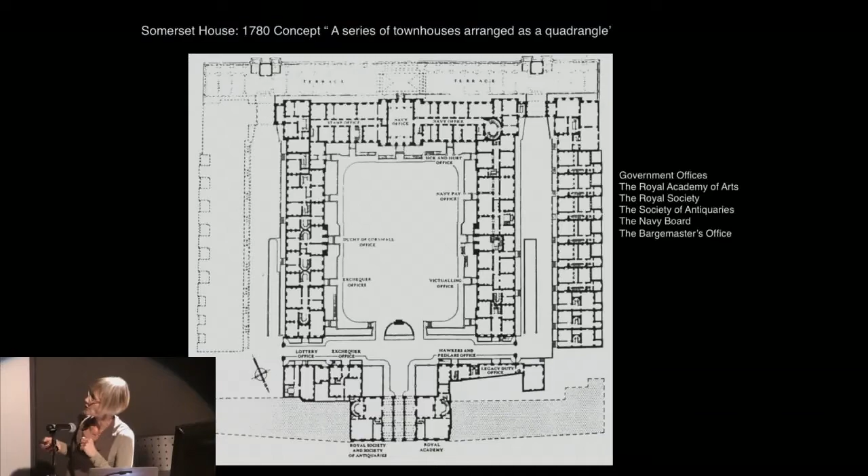And what's kind of amazing about this building is that the concept here, William Chambers' concept, was that it should be a series of townhouses arranged as a quadrangle. So the idea that each department and the various people who lived and worked in this complex was conceived as a kind of collection of houses, of townhouses.

So this kind of confluence of civic building, urban form, and the idea of a house is fascinating as a kind of model of a mixed-use urban building from 1780 that today finds life, contributes to the cultural life of London in such a proactive way. This transformation, this adaptability of the type of this heritage building contributes to the social culture of London as much as the architectural culture, and is a wonderful example, I think, of heritage that becomes part of a future urban life.

Now I'm going to talk a little bit about my origins. I often get asked at the end of lectures where I came from and how did I get where I am, so I thought I would get it over with at the beginning. Maybe it would give some insight into my approach to city building and ideas of identity, urban identity, architectural identity.

One of the reasons I was brave enough to put this on the screen is that I read Louis Sullivan's book, The Autobiography of an Idea, a couple of years ago, and it amazed me, the honesty and the mystical quality of Sullivan's approach to nature and the conjunction of major infrastructure projects with the American landscape in the mid-19th century.

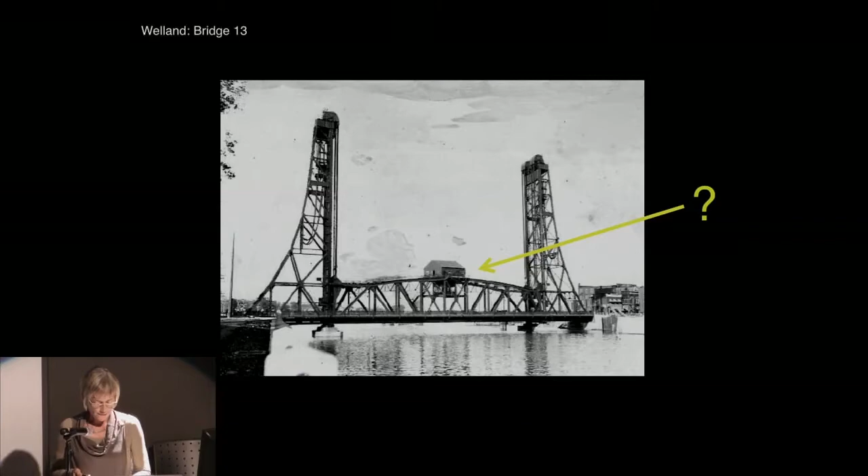But then, of course, this was my nightmare - that I would be stuck up at the top of the bridge with the bridge master, and then one of the cables would snap on the big concrete counterweights and we'd come crashing down. So you could say I was traumatized and fascinated at the same time by this piece of infrastructure.

This slide is interesting because I always felt Welland was a sort of lost place, that it had this ambition - this amazing main street image, a kind of mini Eiffel Tower at the end of your main street was a fantastic thing.

The courthouse, which is still there, and the clubhouse, which has since been torn down, were among the few buildings of architectural significance on the banks of the canal. They demonstrate a kind of civic aspiration at the founding of this city, and the hope that Welland might someday be another Manchester, who knows.

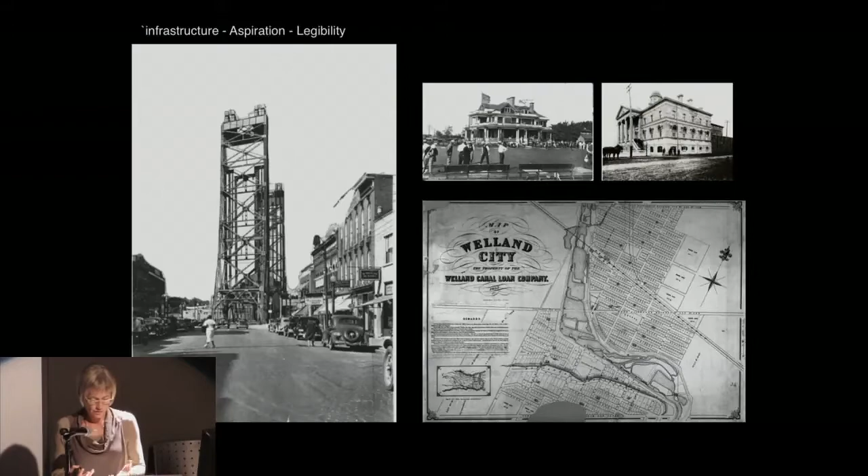But one of the problems of Welland was that it never really had a good urban plan. It was a very confusing place to live. The Welland River crossed the canal, and there were also train lines, everything just converging in a disconcerting way. So the legibility and quality of the city as a series of civic spaces was non-existent - this was about as close as you'd get to a civic space.

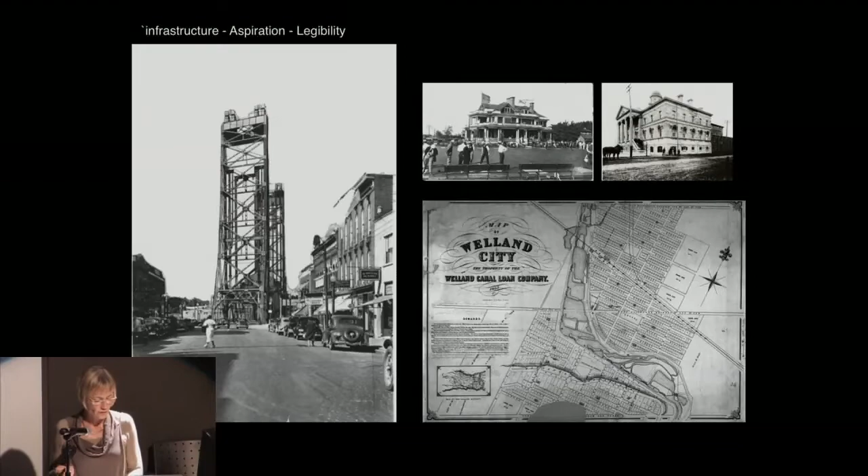Welland kind of died when the industry shut down - Atlas Steel, Union Carbide - and then it really kicked the bucket when the Seaway Mall was built. The downtown core died overnight when this was built, I think in 1974.

To me, the words of Gertrude Stein kind of epitomize all of these places that are faceless, identityless and ubiquitous in the North American landscape - the mall, the box building with its parking lots.

But not everything was bad in the Niagara Peninsula.

I sort of grew up with these books around the house. My mother actually took a very serious amateur interest in the early architecture of the Niagara region. This book, which I have a copy of, number 495 out of 500, is by Peter Stokes, who taught at the school. I actually took his measured drawing course, and I think I got a C, which I was really disappointed with.

I just want to show how this kind of tradition, the art of measured drawings, and really understanding how something like a door comes together out of the various pieces of wood and the joints, and just the joy of drawing and of really understanding how things are made traditionally in architecture by craftsmen, was quite an influence on me. This is a reissuing of the book, which I understand happened a couple of years ago.

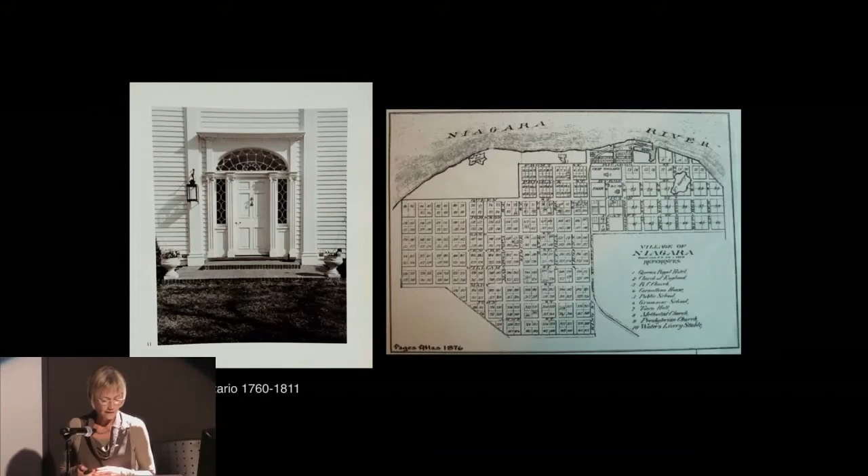Apparently nowhere else in the world of neoclassical or even Adam architecture are elliptical fanlights found. It's only in Ontario. And obviously the very legible, rationalist urban planning, which meets the river in a very direct way, is basically a format for a sort of urban infrastructure that has endured and has become a kind of showcase of the Niagara region's vernacular.

Some would say it's overly touristic now. I haven't been there in probably 30 years, but I still think that there's an understanding there that the quality of architecture and the way it operates in its urban landscape is something that's generated huge social, economic and cultural value, not just for Niagara-on-the-Lake, but for the region.

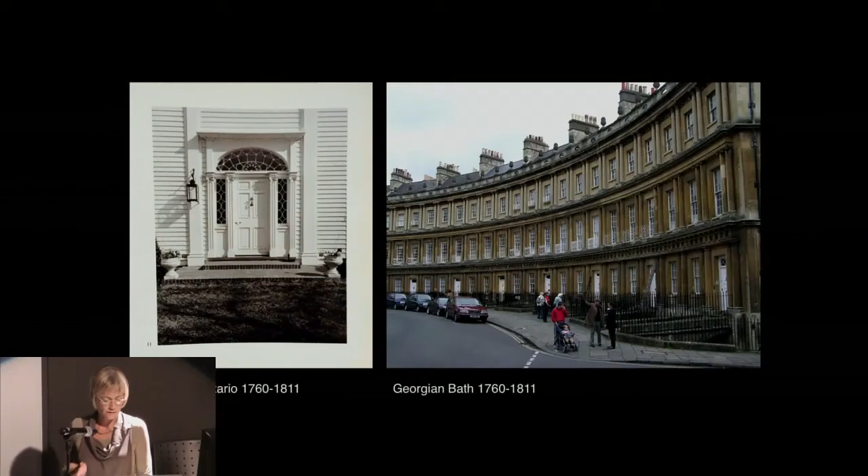What's interesting for me now in retrospect is to compare the Georgian architecture of early Ontario house building with what was happening in Britain at the same time. So Bath and its crescents was a simultaneous urban and domestic architecture, a development model at the same time that early Ontario towns were emerging.

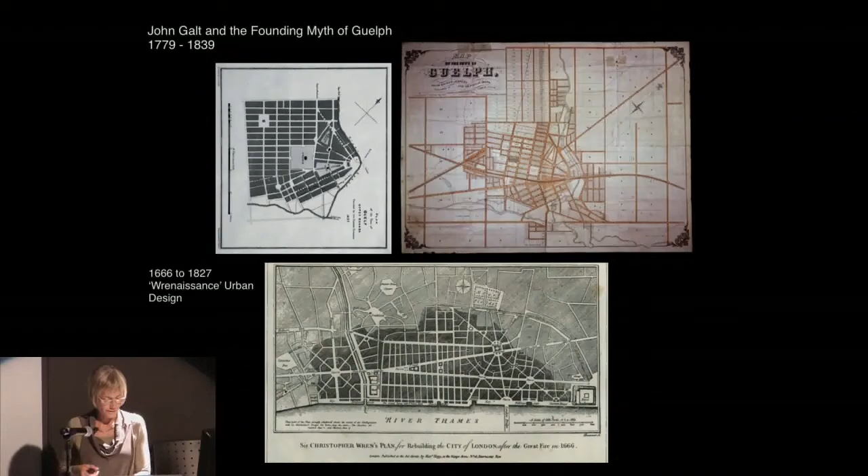The move to Guelph was part of a shift from an industrial town to a university town that did have an urban design. Here are plans of John Galt's original concept for the town, based on its radial configuration and access to the cathedral, and how it evolved into a bigger scheme, drawing on the tradition of Wren's reconstruction of London and what's called Wrenaissance urban design, since Wren was building on the Renaissance tradition. That's a typical use of the word in Britain.

What's significant for me, and relates to what's happening in Waterloo and other small cities that are the subject of this exhibition and festival, is that the civic quality and clarity of Guelph's urban plan, supported by coherent Georgian architecture made primarily of stone, this consistency of material form and urban design is a great heritage quality of Guelph.

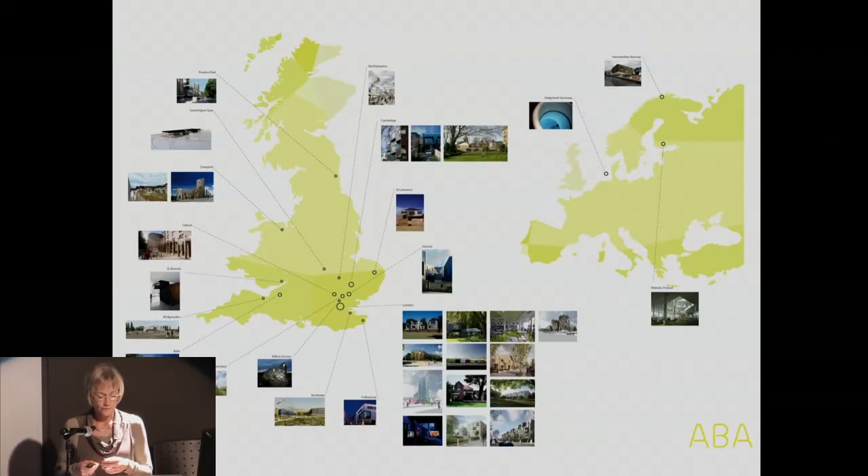In a way, I now see this thesis project as the project of my practice — this project of city building. Although that wasn't intentional or overt when I started my practice, it's funny how these things emerge from your experience and become a project.

This slide is a synopsis of the projects ABA has either built or is delivering across the UK. You can see mostly projects in London and the southeast, some in northern cities. This demonstrates the economy of Britain as well — all of the economic activity is around London, and the north is still suffering. We've also done competitions and various projects around Europe.

This is another image of the projects — all of these are what we have either on site or in the office in planning stages at the moment. This is Accordia in Cambridge, which is built, the South Acton estate regeneration, Tribeca in Liverpool, another estate regeneration scheme, the South Kilburn estate regeneration, Dollis Valley estate regeneration — a master plan for 620 dwellings and a community centre based around three squares.

A scheme in the Olympic Park, another scheme in Ealing in London. This is Bath, and this is Cambridge.

The reason I put these all together is to test for myself the notion that maybe these buildings don't have to be housing, that they can be urban buildings, and it doesn't really matter what the use is — they can become office buildings, hotels, workplaces, studios. Housing is actually the stuff of cities, and if it's robust, adaptable, and generous in its spatial and material characteristics, it can become a kind of adaptable future heritage.

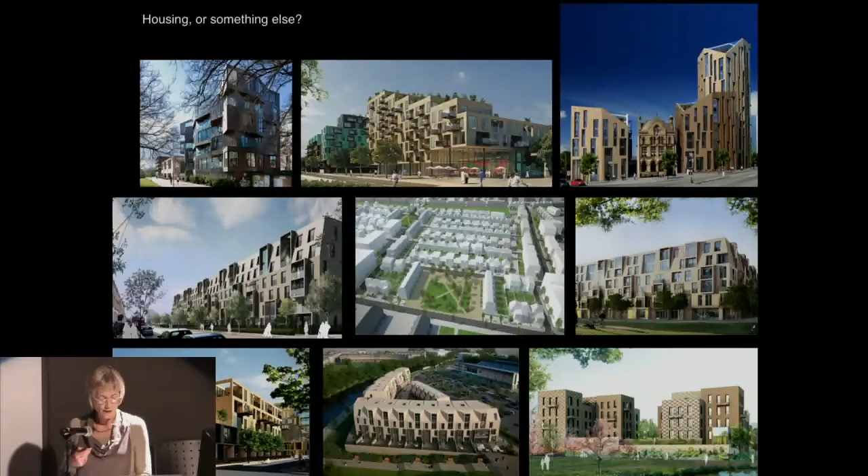This is my little reference to Darwin and his theory of evolution — that the fittest survive through adaptability — and I've added the term generosity, because I think that's one of the huge problems in the collective consciousness of people who commission buildings: a lack of generosity, in spatial and material terms, which contributes to the decline and unsustainability of buildings.

This is a little project we did, a competition called Adaptable Futures, where our proposition was to modify the warehouse typology, both in terms of spatial layout.

It's a kind of hybrid of office building and warehouse, with floors at different heights, so you actually would rent volume instead of area. That's not only the rigor and economy of construction part of its adaptability, but also the iconography. The idea was that the crest of Oxford Brookes University, a potential client for this building, was abstracted and enlarged to become a pattern within the glazed brick of the building.

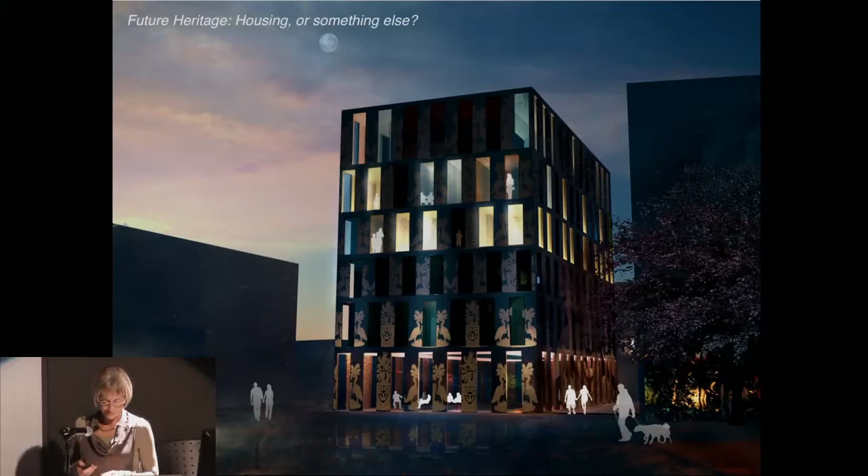So this combination of robustness, adaptability, and iconography means the building has more chances of survival in this climate, as part of an investment in the future.

Here's another concept that drives our work: this notion of hybrids, that hybrid structures are also more adaptable. Some of the projects we're doing now look at how to combine the principles of a mansion block with a warehouse, with explorations in geometry, crystalline or trapezoidal geometries, as part of translating these historical typologies into ones about our present condition.

This is another reference. This was our concept for our Newhall Be housing, that a suburban development can be a kind of hybrid between a traditional English shopfront you'd find on a normal street, a barn—this is a very famous barn in Essex—a Miesian patio house, and Brancusi's totems.

This was our aspiration, that the development would have both a sculptural quality, a reference to the local vernacular of barn buildings, and also that the suburban house would be transformed by having workspaces within the houses themselves, so that the suburb becomes a place of work.

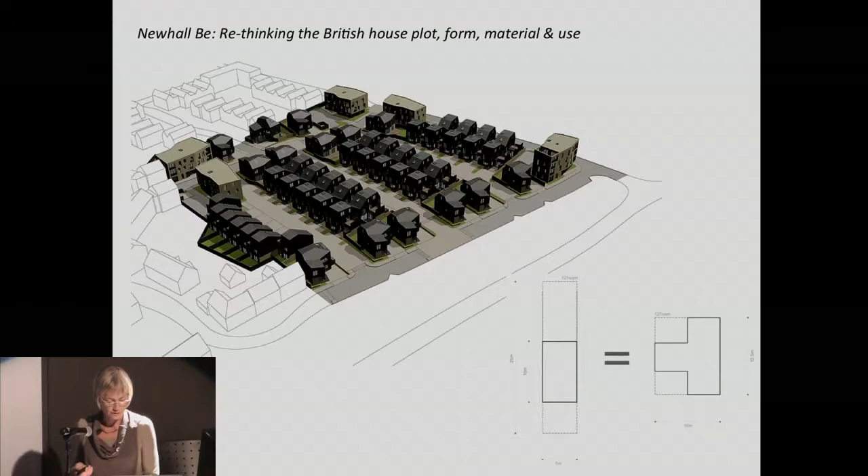There are no gardens because the houses are packed back to back, but the spatial offer in these houses is about 25% bigger than what you'd get in a standard British developer house. This is just one example—you can see lots of images of it on our website.

But it's just to make the point about the idea of the hybrid: each one of these front rooms in each house is an office, a home office. Some people even have signs up of what they're doing, like wedding photographers or web designers.

And the adaptable roof houses were sold with the top floor unconverted. For £8,000, you could put in a stair, line the loft, and get another room in the roof.

So this kind of mixing of references and building in adaptability and spatial generosity is, I think, one of the key reasons why this project has achieved such recognition in terms of British house building.

Now I'll go back to London, and I'd like to refer to this evolution of London, because it starts as a Roman settlement a couple of thousand years ago, and it incrementally grows. It's a sort of radial growth, and it evolves into a very dense network that continues to be radial and is interspersed by garden squares and parks.

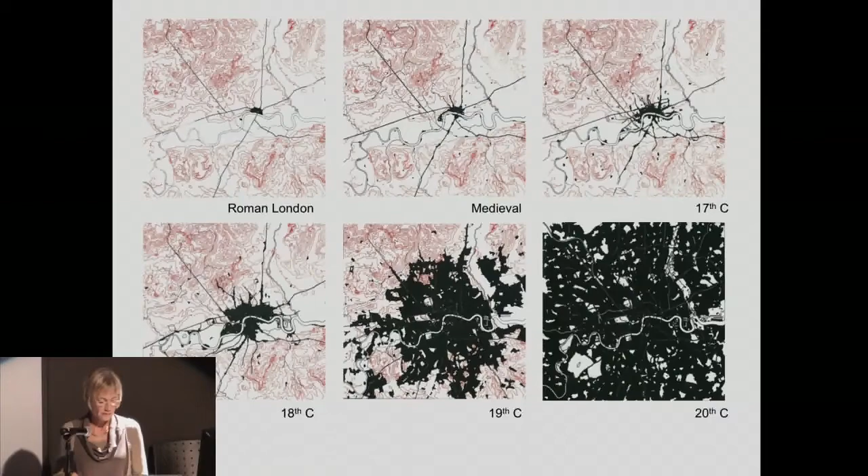So now London is one of the greenest cities in the world. It has one of the highest ratios of open green space per citizen compared to any other world city, but at the same time is very dense, networked through rail, transport, and underground systems that make living in London actually quite sustainable.

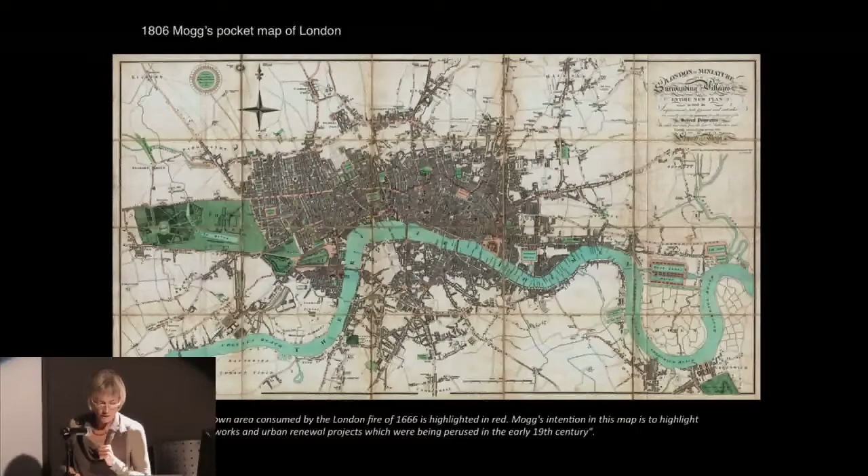Nobody really owns a car in London anymore, unless you live on the edge and have somewhere to go at the weekend, which I don't, because I'm Canadian. I don't know anybody who lives outside of London. So it works for me, although I do have a car, I have to admit.

And then this map I find really fascinating because it starts to reveal the kind of urban character of London as it grows with the advent of, or the institution of, the royal parks, and then you can see the squares, garden squares in the center, and the outline—this red outline—of where the Fire of London occurred.

And the reconstruction. What I find really interesting in this quote is that Mogg's intention was to highlight the various city works and urban renewal projects which were being pursued in the early 19th century.

And it's kind of amazing to think that they were thinking about urban renewal in the early 19th century, even though the city was still growing, it was still in its infancy.

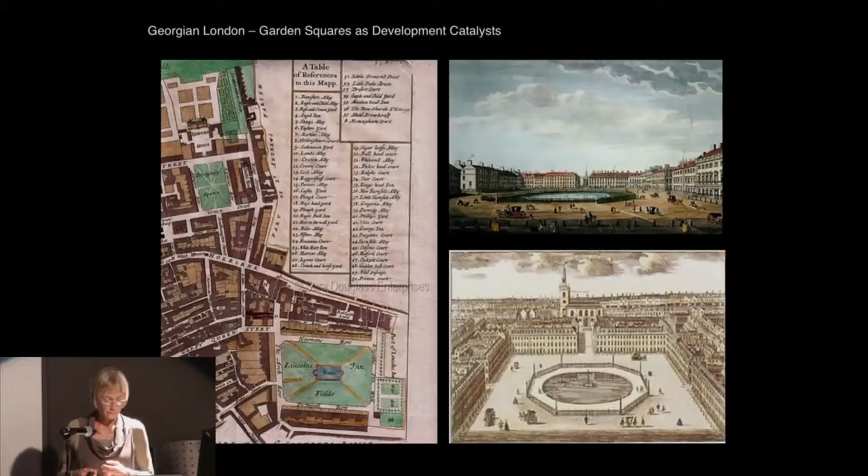One of the other main types of urban development model to which many people in London are now building on, like developers and regeneration projects, are all building on the tradition of the London Garden Square, which in very simple terms was initially a developer offer to attract people to buy houses with access via keys to the Garden Square. So the idea of London's Garden Square actually came from a commercial development impetus, and now is one of the great assets of living in London.

This shows the distance between squares, which is not that much, and how the grain and character of the city is hugely enriched by these captured pieces of landscape. And of course there's Regent's Park and Hyde Park and St. James's Park and all of the other great park traditions.

So in a way, all of these are part of a principle that I adhere to and try to promote in my work, which is that housing is urban design. You can't divorce urban design or urbanism from an act of building, because you always impact the city or place in which you build, and housing should act as a cultural artifact, a meaningful and enriching cultural artifact in terms of people's quality of life and the character and quality it offers to the city as a kind of public act.

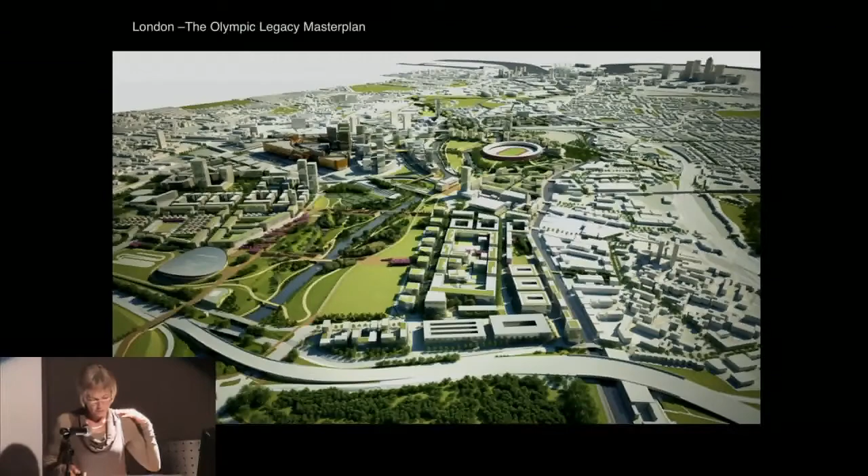This is zooming into the various places in London where we're doing regeneration schemes at the moment. One of them is in the Olympic Legacy Master Plan. We're doing a competition at the moment on a team with, I think, five other architects altogether to implement this whole side of the Olympic Park.

This is going to provide 1,500 new homes and a cultural center, school, all sorts of other uses within a maximum build envelope of 6 stories. And actually the master plan is evolving so that it's only townhouses overlooking the park.

This is the kind of city building initiative that's going on in London. This is on site right now, Chobham Manor, in between the Velodrome and Stratford, which has been completely rebuilt, Stratford City Centre.

This is another master plan where one of our projects, we collaborated on this master plan for the South Acton Estate Regeneration with another practice, and that was phase 1, this is phase 2, and our building is on site at the moment. It's very much about reconnecting the estate with a new series of streets and public squares and gardens, and then there are private garden courtyards in the center of each block. And there are also houses.

So the principle is for every development that it provides mixed use tenure. Every development is 50% affordable, 50% private, maximum 6 to 9 stories high, and a mix of townhouses, terraced houses, courtyard houses, and urban blocks.

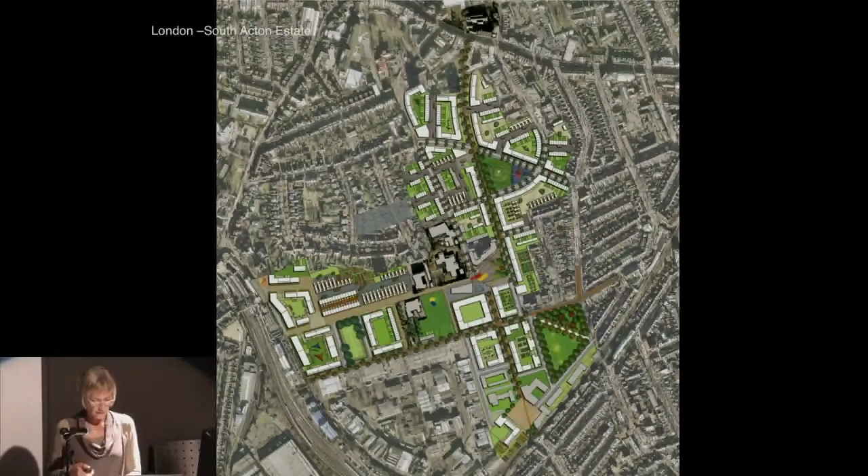So this is another estate where we have a project underway at the moment. It's in South Kilburn, an estate built in the 1960s, and this is the second project we've worked on with the client being the London Borough of Brent.

This is an interesting contrast to our other projects where we're working for the developer at planning stage. Here we're working for a local authority who delivers schemes up to planning. Local authorities own tons of land in London, so they can secure parcels of land, sponsor a project up to planning, and then tender it to the market after consent is granted. This removes risk from the developer in designing something that might not get planning, speeds up development, and ensures each local authority rebuilds its estates according to a long-term vision of the urban character and grain of that neighborhood.

So when we were bidding, this was also a competition. We bid on a team for this with another architect to do this site.

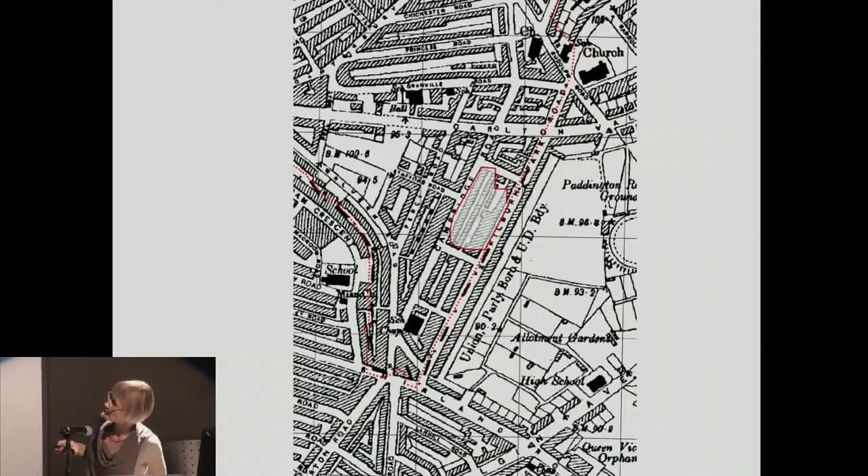I always refer back to the 1880 or 1890 Victorian plan of London, which was, in a way, a sort of perfect urban design. Very legible major streets, boulevards with larger buildings lining them, then smaller blocks as you move into the neighborhood away from the major streets. These were generally terraced houses or mansion blocks, with a park at the center of the site. There's a consistency and clarity to Victorian urban planning that doesn't really get talked about much. I think it's a good subject for somebody still at school to pursue.

So this is the overview of the site. It's called Bronte and Fielding House, which is kind of poignant, after Emily Bronte and Henry Fielding. And this is actually Bronte House.

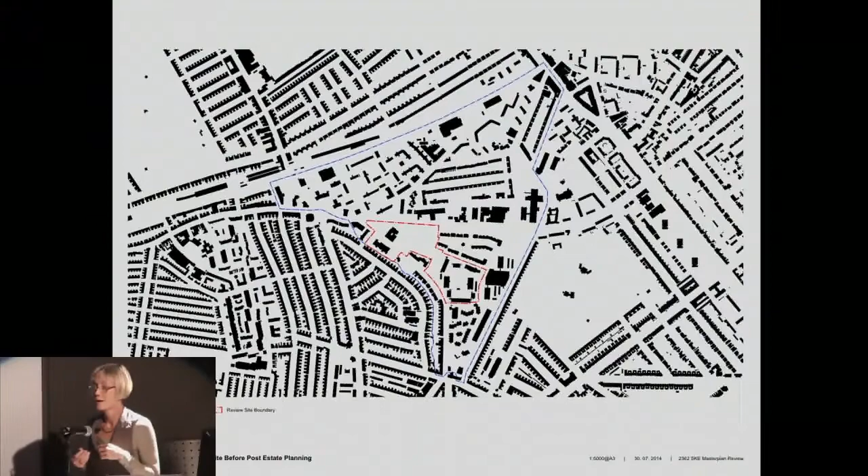This was in 1989, so it's only being redeveloped now, which shows you how long urban master plans take to enact. This figure ground plan shows the atomization of buildings in the context of very coherent and consistent Victorian urban terraces.

And this is the master plan as it stands now. ABA has reworked the whole master plan on behalf of Brent Council to update it and include the new developments that have happened in the last 5 years along here. We were then asked to come up with a completely new master plan for the centre of the scheme, and our revised master plan for this area is now becoming part of the statutory planning guidance for Brent, for the South Kilburn estate.

Sorry, this is out of order - that was the master plan 5 years ago, and this is the current master plan.

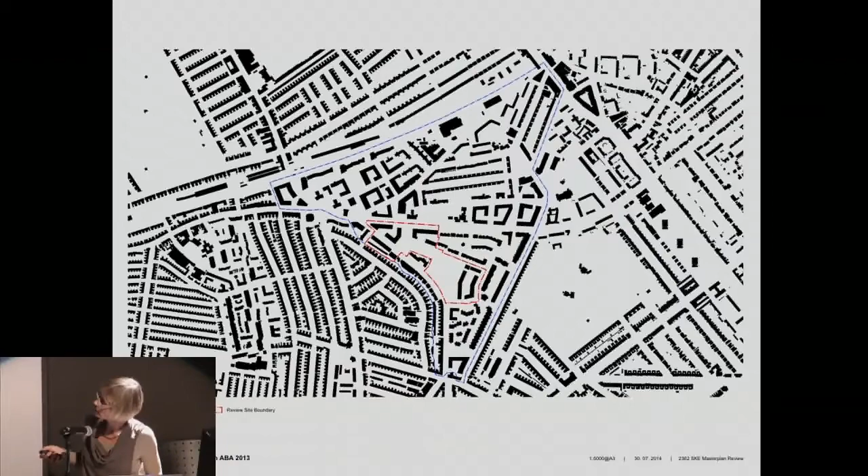So the first piece of work we did for Brent was a site at the top of the plan, where we basically infilled what was an empty part of the site. I think my slide actually flipped around. So here you can see the buildings we've inserted create a new urban block and a mews, which is part of repairing and restoring clarity to the street and built frontages, with front doors opening onto the street as opposed to the slab block in space.

These are actually 2-story maisonettes with 2 stories of flats above. There's little mews houses, then a little apartment building, and a kind of completion of a flat iron block. So we've created a kind of modified garden square.

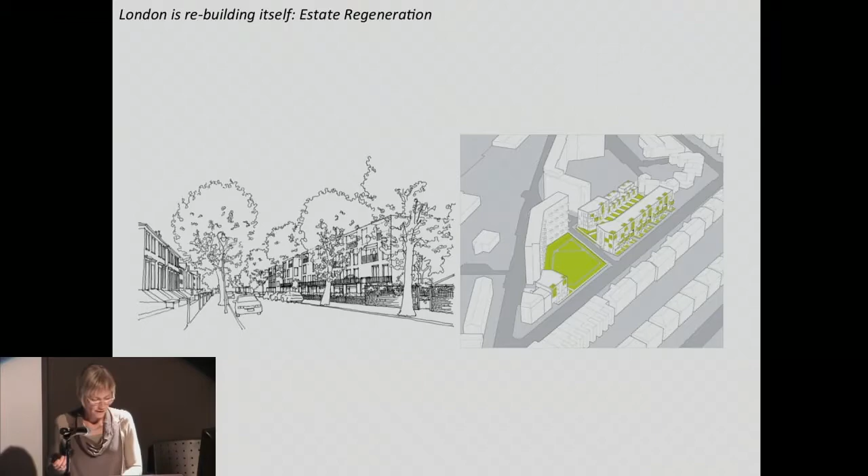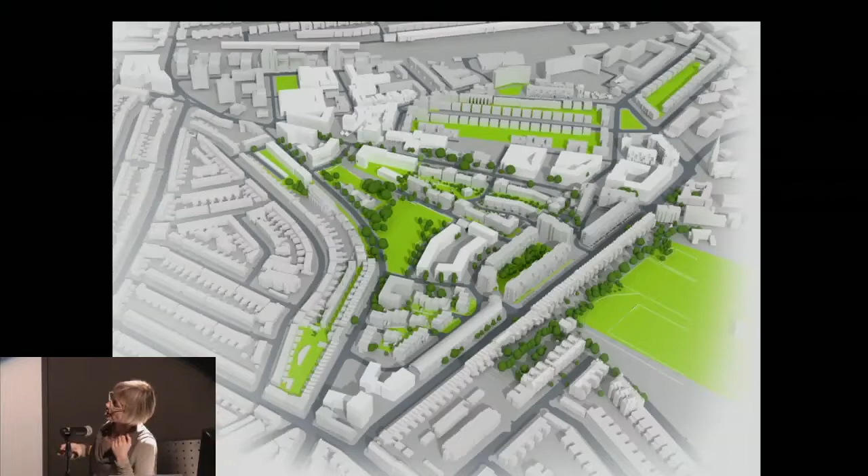And this is the volumetric master plan we've just updated for the South Kilburn estate. It shows our first scheme, Ely Court, up here, and the scheme we have on site right now, Bronte House and Fielding House, which completes or restores the urban boulevard. Then there are new proposals for urban blocks, a new school, and a new park - the first new park to be built in Brent for about 100 years.

So our scheme for the Bronte and Fielding House was referring to the Victorian street pattern, understanding it in relation to the new development, and bringing in the mansion block typology with its communal gardens at the center of the block as the format for restoring this piece of Kilburn. This is how our contemporary module works for the mansion block.

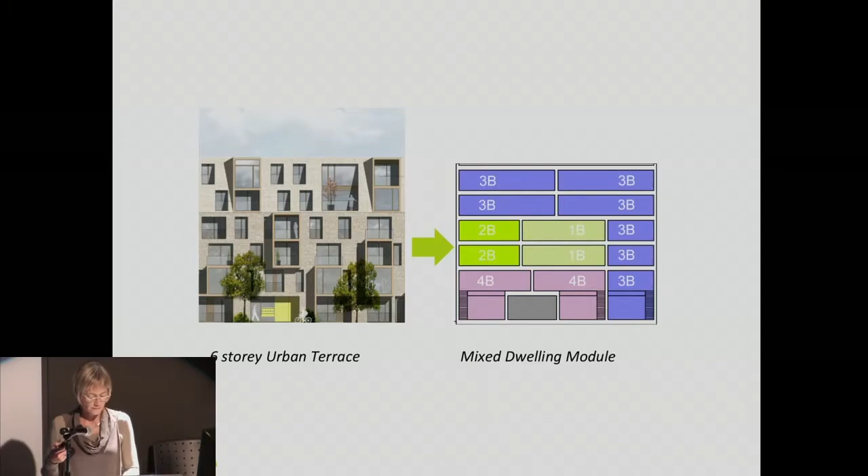It's amazing because you can make any sort of mix—this could be 100% 1-bedroom flats, or 2-story 4-bedroom maisonettes, 3-bed maisonettes, 1-bed flats, 2-bed flats, 3-bed duplexes or penthouses on the roof. This idea of mixing the demographic, tenure, and value of future residents means you have an automatic mixed community, which is generally seen in London as a good thing—it's actually legislated. You have to have a mixed community in every development, and it has to be tenure blind.

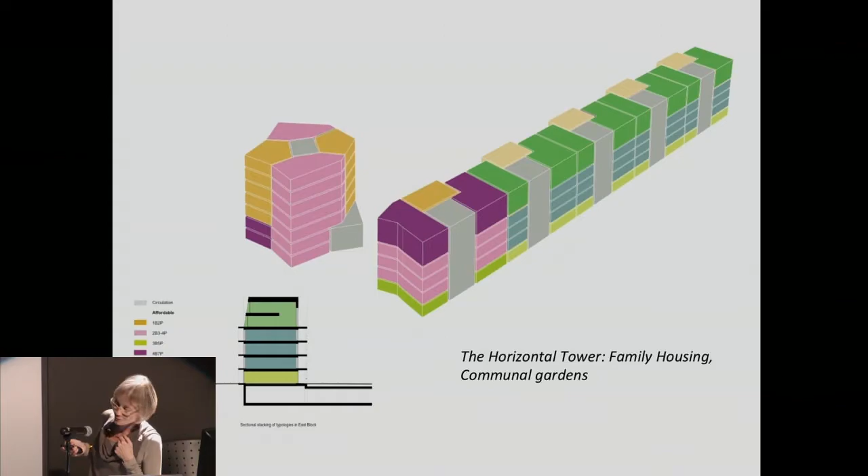So this is how all of these elements pack together in our mansion block, and it slightly modifies at one end, and then we have a little building that's a bit like a maple leaf in plan. It turned out like that by chance—it wasn't intentional, but it was the only form we could devise that complied with all of the offsets and distances from its neighbors.

We turned this terrible suburban corner of the street layout, the 1960s street layout, and created more of a landscape setting at the south end of the communal garden square.

I'll point out, maybe you can see in these layouts for the flats, they're dual aspect flats—bedrooms leading onto porches at the front of the house, sort of verandas, living rooms and kitchens at the back onto a private garden. All of the space standards for every dwelling are regulated by the Mayor's Housing Design Guide, so you cannot design flats that are undersized, not wheelchair accessible, don't have daylight and sunlight into every room, and don't have natural cross ventilation.

This idea of government legislating space standards and housing standards is, I think, universally accepted in London as the best thing that's happened in London's development scene in the last 10 years. That was Boris Johnson's initiative, actually, the Mayor's Housing Design Guide.

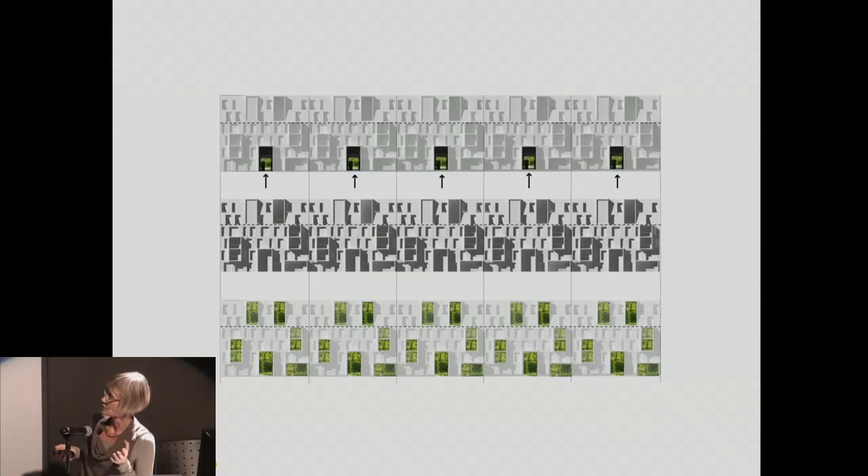This is a diagram illustrating how we often talk about pattern and scale. When you're working with really big, long buildings, it's really important to generate diversity, so we play with the perception of scale by having really big double height bay windows and balconies, and huge 2-story high dormer windows that refer to the arts and crafts tradition of studios in the roof—this one with a mansard roof.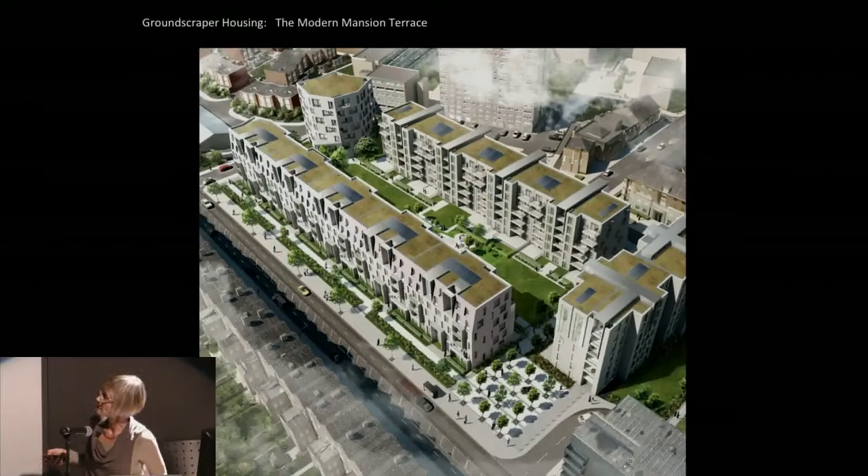This communicates how I see the role of this building as framing the street, framing the view to St. Augustine's Church, a really fantastic neo-Gothic church, and restoring a sense of place and civic public realm that's clearly public, with the private world of dwelling and of home contained within the body of the block. We've also incorporated a new little public square and a boulevard that passes from one side of the block to the other.

And this is a photograph taken about a month ago of Bronte House coming down. It's amazing how it reminds you of Pruitt-Igoe and the famous death of modernism, when the very first of the 60s tower blocks came down so dramatically.

So next I'm going to talk about Bath, which is a complete contrast in terms of context. Bath is a UNESCO World Heritage Site. It has Roman baths at its center, and it's a spa town originally, both for the Romans and the Georgians and Victorians after them.

It had its great urban heyday in the 18th and 19th centuries when the crescents of Bath took shape. In a way, Bath epitomizes the idea of future heritage, because this is a city that has a huge tourist income, a direct product of its architectural and urban quality, but it's also a university town with a growing high-tech economy, a high-tech corridor between Bath and Bristol. So you might think, or I've been told, you can't refer to Bath in your work because it's too beautiful and extraordinary for anybody to emulate. But I feel like you should try to emulate the most beautiful and consistent city produced in Britain, because that's where the aspirations should lie. Why shouldn't we aim for the highest level of what can be achieved when there's a coherent vision?

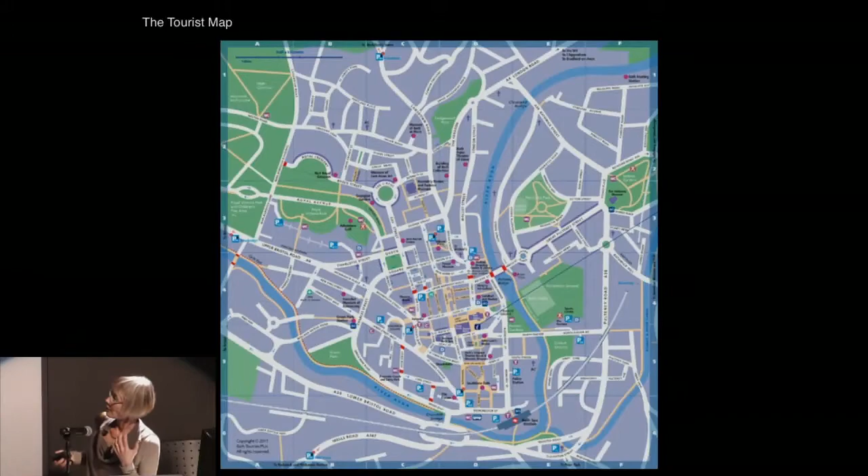Our project in Bath is just off this tourist map, just over there. But I think it's interesting to produce a tourist map of every city you're interested in, because tourist maps show the landmarks in architectural terms - normally the architectural features, but also the clarity and distinctiveness of the great crescents which characterize Bath, built by John Wood the Elder and John Wood the Younger in the late 18th century.

This figure ground plan shows a very clear urban structure, and our site is over here, on the edge of what was formerly an engineering works - a Stothert and Pitt engineering works that produced cranes, shipping yard cranes, all over the British Empire. Obviously it's no longer active - all the steelwork for big infrastructure like that is made in China now.

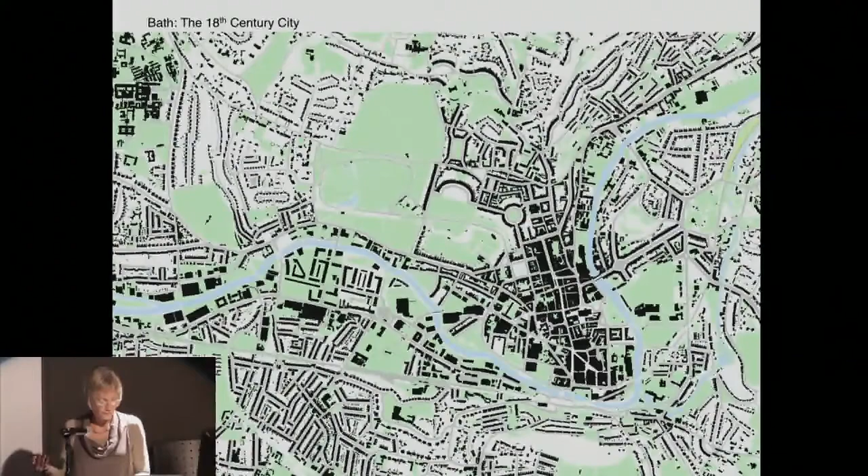So this was subject to a regeneration master plan by Feilden Clegg Bradley several years ago for the developer Crest Nicholson. We had the opportunity to compete for a site here, and you can see our scheme is already there. It's quite interesting - one of the great things about working in housing is that the scale and scope of a housing scheme normally does have an impact as a new figure ground, a new urban form that appears on that kind of drawing.

This shows our very close neighbor in the scheme, Norfolk Crescent, a later example of the Bath Crescent, and this horror here on our boundary, a big box Sainsbury's store with a parking lot all around it - the kind of development allowed in the 70s and 80s and now would never, ever happen in a city like Bath, because they realize this kind of development kills urban quality and reduces their chances of retaining World Heritage Site status, since UNESCO comes around to check your city every couple of years to make sure you're not doing anything to detract from that status. There's also another unfortunate car park back here.

Our site has a kind of unique position adjacent to the river on a sort of promontory, and quite an unusual triangular configuration, which was kind of unfortunate, but led to interesting speculations.

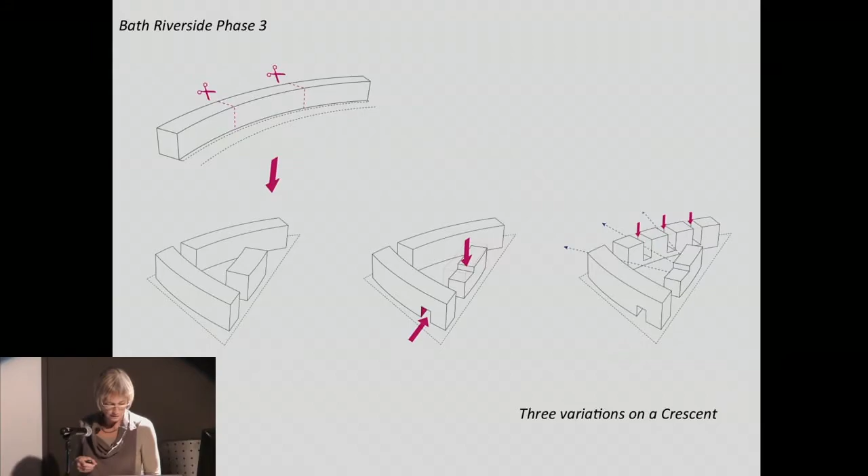This is a kind of early 3-dimensional rendering of our scheme, which starts to show how actually the roof becomes a very important element of the scheme.

Bath is on a hill, so everybody looks down on our site, and the 15 preservation societies you have to consult with in Bath were very concerned about the roofscape and quality of the roof. At the same time we try to use the roof as both an important means of creating domestic character, so it reads clearly as a series of houses, a terrace, and something interesting happening spatially up there. They're acting as apertures to frame views to the landscape.

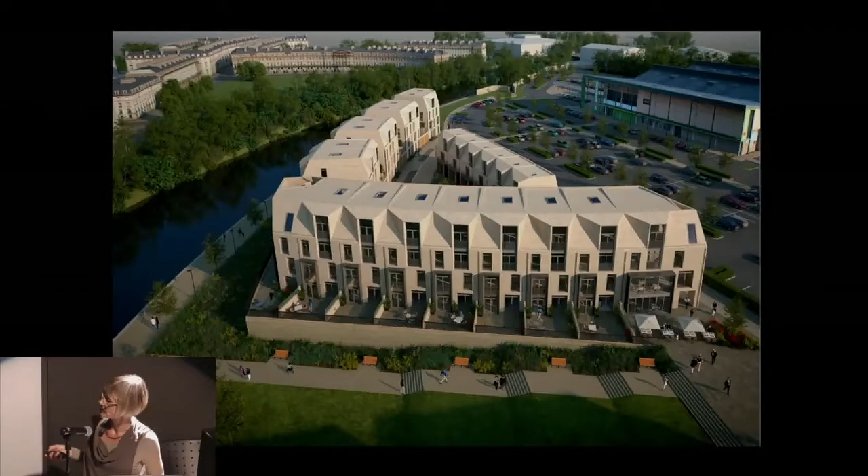This shows how it operates on its plinth. This is not a solid plinth, it's a permeable stone wall, because this is a floodplain - the Avon River floods every spring up to here. So the entire landscape has been decontaminated and reconfigured as a really beautiful river walk that connects down right to the center of Bath.

These houses have no front garden or back garden, just a terrace at the front and back. Again, the idea is that because we compensate with a communal landscape and roof terraces, there isn't a need for a traditional garden with lawns.

And so this is the site layout. It's quite tight - there are cars and garages in here on plot.

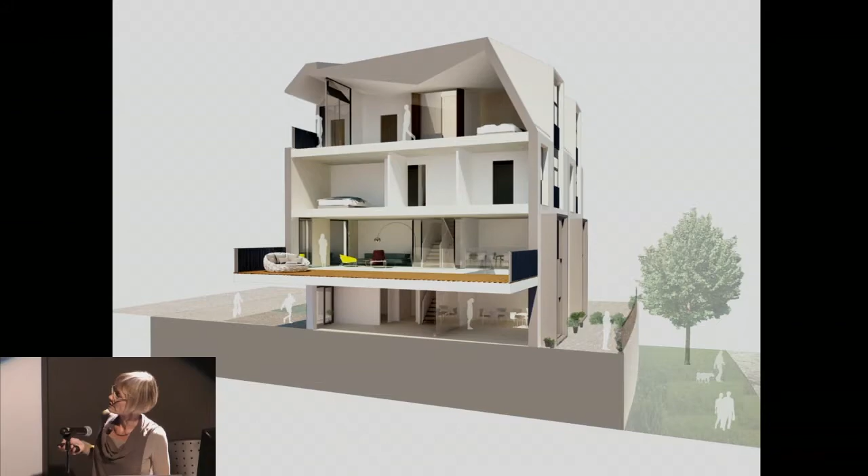But the way the houses work, on the ground floor there's a double height space connecting the ground floor and the first floor, a piano nobile, living room, roof terrace, bedrooms, and a kind of spectacular roof which can be used as anything from family room to bedroom to offices. It has this spatial quality as a kind of viewing platform to the landscape.

I just wanted to make the point again about the great thing about working in housing is that you work simultaneously at so many different scales - it's the urban scale, how it operates as a sort of urban artifact.

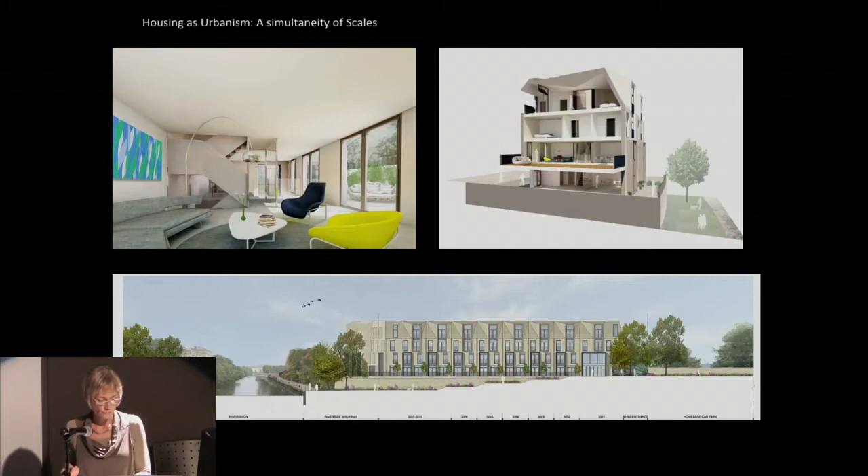Also the quality of the dwelling spaces and how it all comes together as a home. Maybe one day it will be adapted and become like the Crescents of Bath - hotels, offices, even the home of the Bath Preservation Trust, which at the moment is in one of the Crescents of Bath. These images show how the development works as a set piece in the landscape, but also has a very intimate courtyard and mews quality.

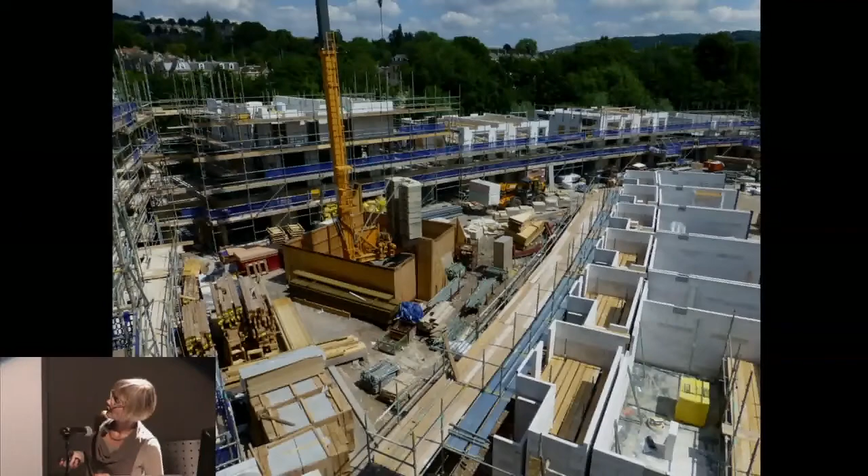And this is how it looks on site at the moment. I was there last week, and the site is progressing - very constrained and difficult to manage everything on this very tight triangular site.

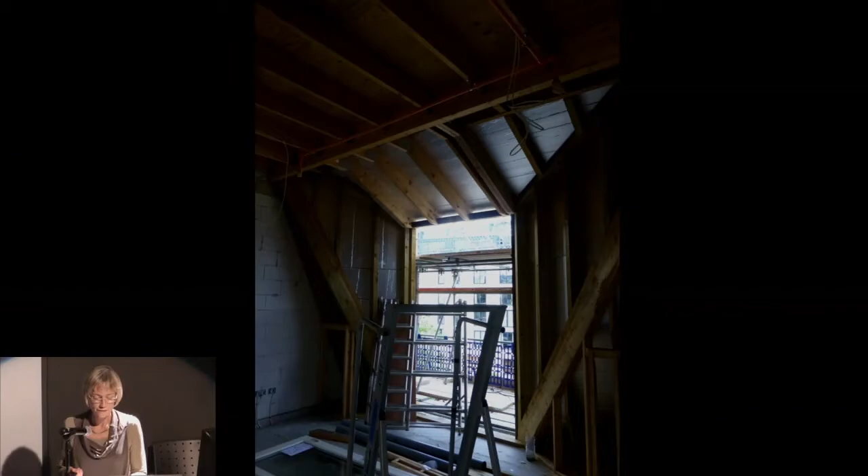This is the dormers in their first stages of execution, and the carpenters are struggling but conquering the geometry of the splayed dormer, which is the unique element we've been developing at ABA, and this is how the framing is starting to work out on the interior.

I must add that this is a blue chip housing developer who's delivering this development, and these houses are going to be in 100% Bath stone - 75 mil thick load-bearing Bath stone. So the argument that you can't use high quality materials because the development won't generate a return or a value is a fiction in most cases, because you can develop houses like this in solid Bath stone.

I don't know what other constraints you can point to. Obviously the development equation has to do with cost and return, but it is possible to build buildings in stone and make money even as a blue chip housing developer.

Finally I'm going to talk about our project in Oxford. We were invited to participate in a competition - there were 25 participants, narrowed down to a shortlist of 5, and the commission was for a fully residential teaching academic quadrangle for Exeter College, as a second campus to their Turl Street campus in the centre of Oxford.

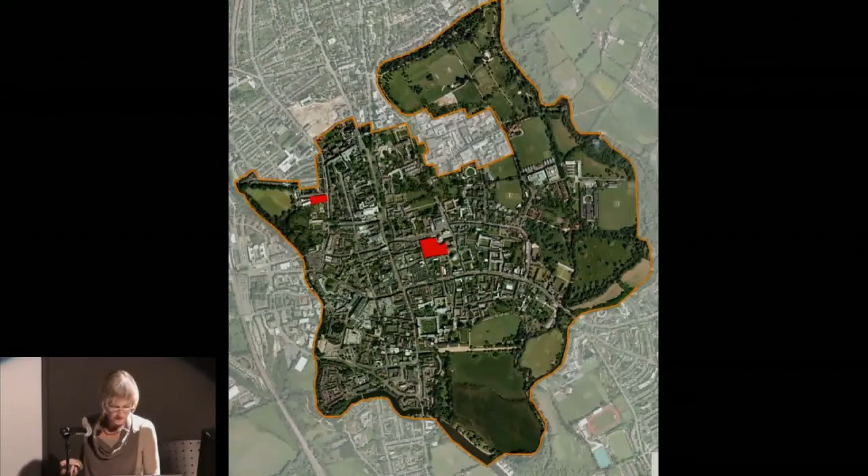So this is zooming in - it's about an 8-minute walk from the Turl Street Quad to our site, showing the proximity. This is the historic core of Oxford, and here you can see the morphology of Oxford and its city centre as a series of quads, all of which are colleges, completely independent, autonomous quads. The University of Oxford is a separate entity, mainly based up here.

So each college quad has its own character, its own fellows - it's a complete world unto itself. And this is the context of the city centre, Exeter College.

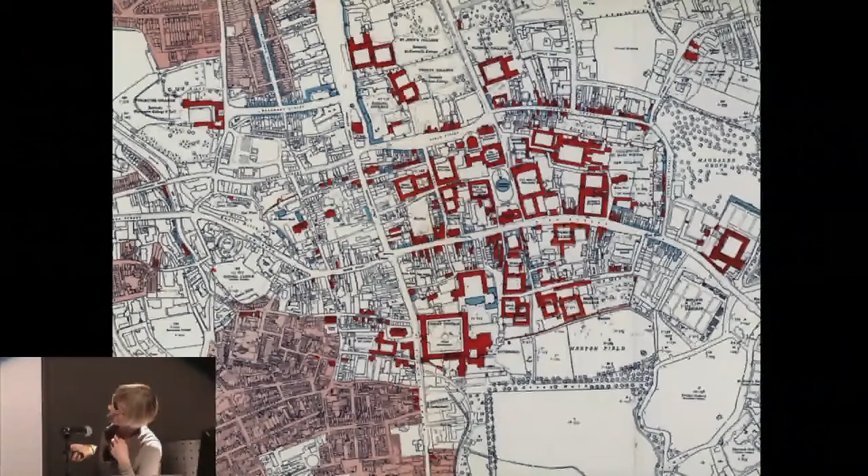This again shows the morphology of the city, which is based on quads that used to be monastic communities, places where the aristocracy sent their sons mainly to be educated. After the dissolution of the monasteries they became colleges, so this monastic format of the fortified monastery has become the academic collegiate model, both a figure of teaching and of urban and domestic life. It's an incredibly powerful thing.

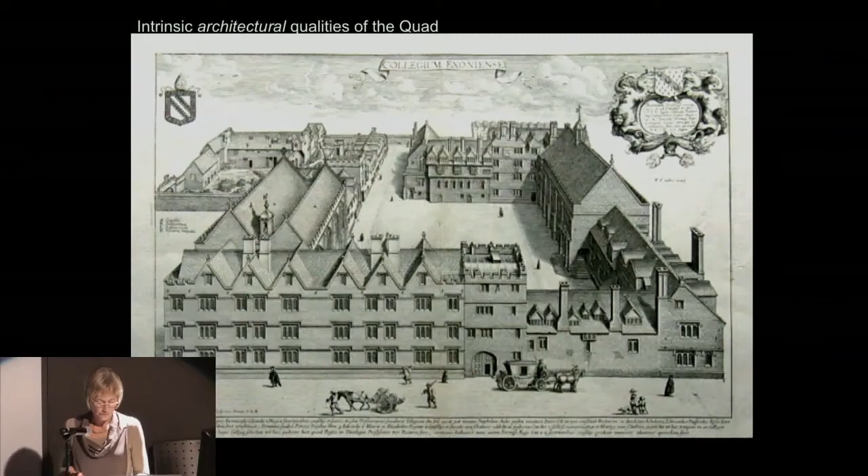It's now George Gilbert Scott's chapel in one of these quads, so there's also a tradition of building jewel-like buildings in the middle of quadrangles as the need to densify and expand took place.

This is Exeter College seen from Broad Street, and another prominent characteristic is the roof line. A lot of these dormers were actually extensions and additions to the original buildings for student accommodation, so the roof line of Oxford, although it's seen as a set piece, is something that has evolved over hundreds of years.

We had to use this argument in our project to justify our designs to Oxford City Council, that the tradition of an evolving roofscape was something we were building on, both technologically in terms of functionality and format and material.

This is my client, the Fellows of Exeter College. There's 44 fellows, each responsible for tutoring students, normally 2 or 3 at a time, in their fellows' sets or fellow studies within the body of the college.

The driving concept for our scheme was this idea of the scholarly home, that the new quad has to be a home not only for the fellows but also for the students. What is the image of the scholarly home, and how can the traditional collegiate quad be reinterpreted for the 21st century? One part of the DNA of the Oxford and Cambridge quad is the idea of the stair, two rooms to a stair.

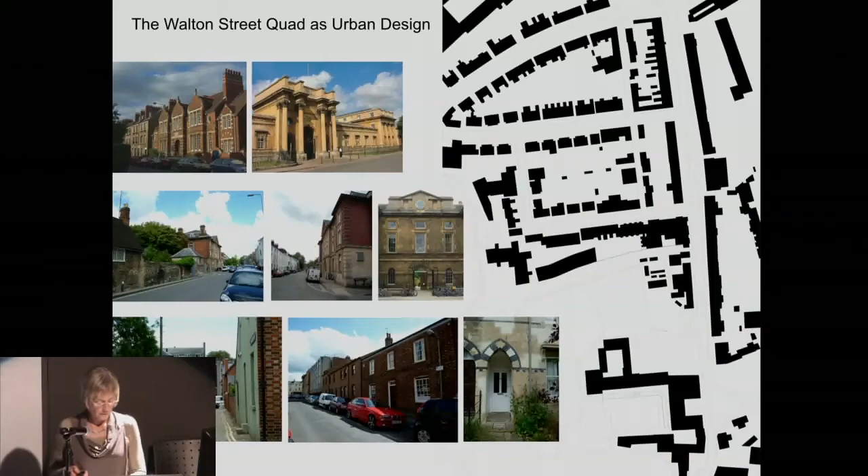So these diagrams were part of our initial expression of interest, where we had to communicate our approach on one A4 page. This is one of very few images that we put on that page.

I highlighted it because lots of fellows afterwards told me they thought this was the most interesting thing they saw of all the submissions at the first stage of the competition, because it showed them the possibilities and potentials inherent in the site, depending on the format of the layout, the typology of the quad.

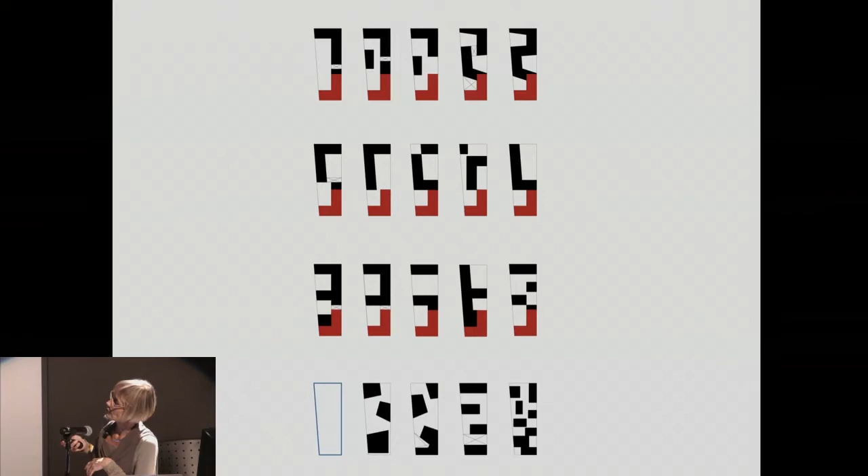So the existing quad is more or less like that, but it's much messier. We just tried to show that as an architect, you consider all these different things and test them, and consider the impact of taking a quad that's single aspect facing a garden and breaking it into three - a small courtyard, a big courtyard, a tiny courtyard, making an E-shaped plan. What are the implications and potentials of completely overturning and exploding the traditional quad, or modifying it and inverting it or tweaking it?

So this evolved in the second stage of our competition. This was the sort of empty square we left, which is what we're going to do in the next stage of the competition if we make it through. And this is a kind of diagram of our final scheme, which is an S-shaped quad - it's called the S-shaped quad, so it's kind of this, really, but with an expanded center.

And the concept was that this expanded center would offer a new facility for Oxford students, which is the Learning Commons, a social learning space. That generally doesn't exist in Oxford colleges. There's the hall, the lecture theatre, the dining hall, common rooms, but there isn't something that just allows social learning in the way that we do in our contemporary world.

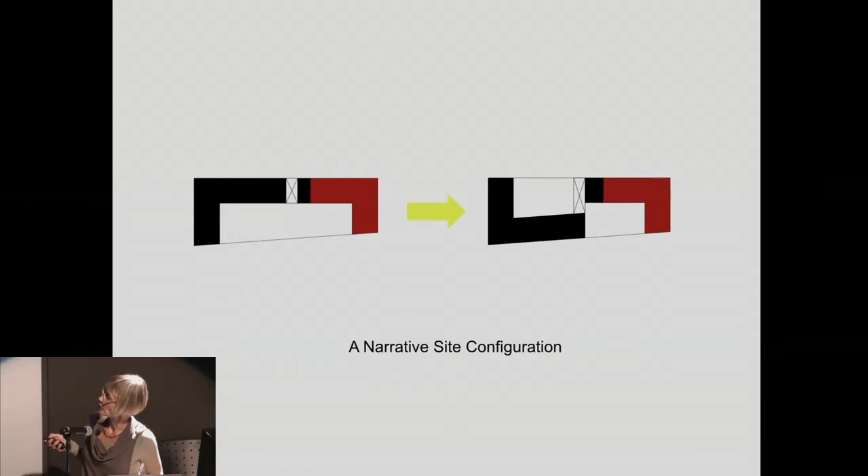And so this shift from the C-shaped quad to the S-shaped quad was to create the potential for a narrative, a sort of various experiences along this route, from the formal institutional frontage of Walton Street to a more intimate and private world of Worcester College with its domestic neighbours.

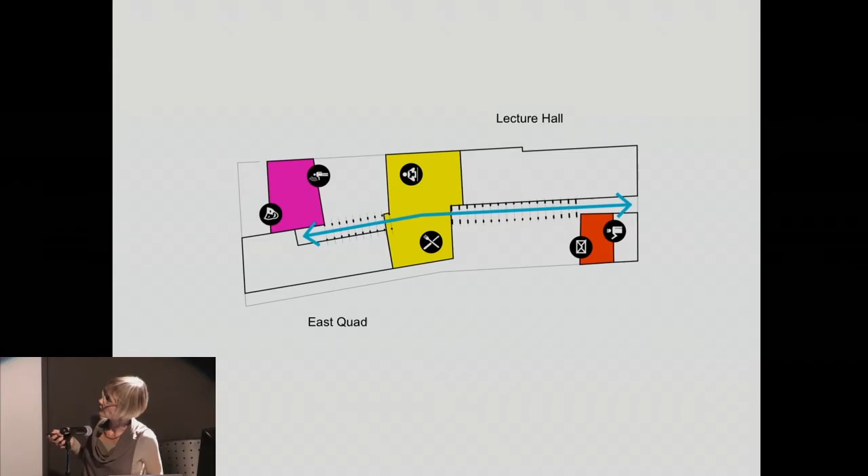And this supports a kind of diagram of Porter's Lodge and public functions at the front, the Learning Commons at the centre, and then the lecture hall is the destination at the end of a route through two cloisters, each facing in a different direction.

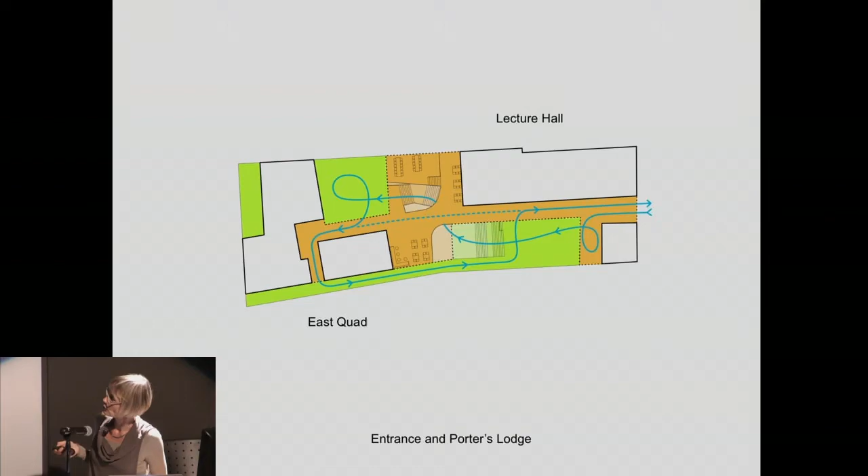This route also has a landscape element because the site slopes. We get three different levels happening at the centre of the site, and you can pass from one quad to the other through the building. Altogether, this creates a three-dimensional ambulatory through the site, a kind of never-ending loop, each offering a different experience of the city and of the building itself, and also encouraging interaction and congregation of the student and teaching community.

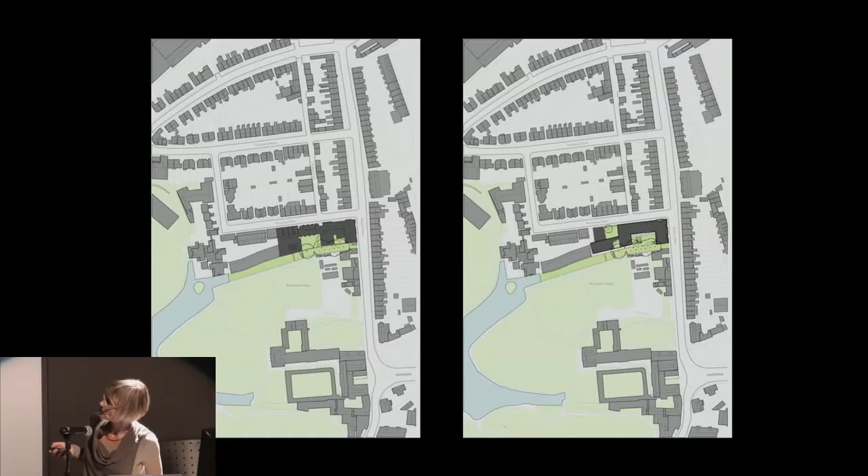So this site plan shows how the original scheme transforms with the S-shaped scheme. The other major constraint was rights of light and height limitations.

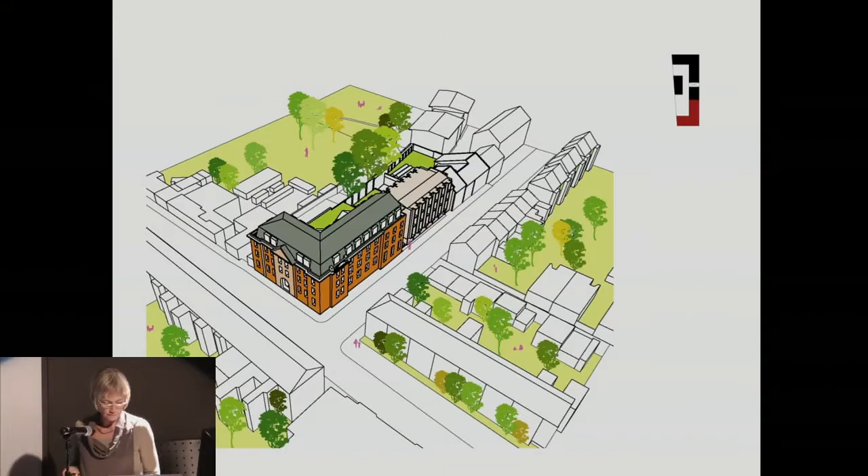So we very strictly adhered to the existing rights of light angle that comes from the adjacent properties, but managed to squeeze in an additional floor. The intention was to soften this additional volume through the curved plane of the roof, which would also become a very important expressive quality of the character and form of the roof and the quad itself. So starting with this is a sort of cartoon of the existing site.

It's an accretion of various buildings from various periods. What happens if you really max out the rights of light angle, and push the volume away from the street in order to get more volume onto the site? Optimize the site is the word - you can't say maximize the site because then they'll say you're overdeveloping the site. So you have to say optimizing the site.

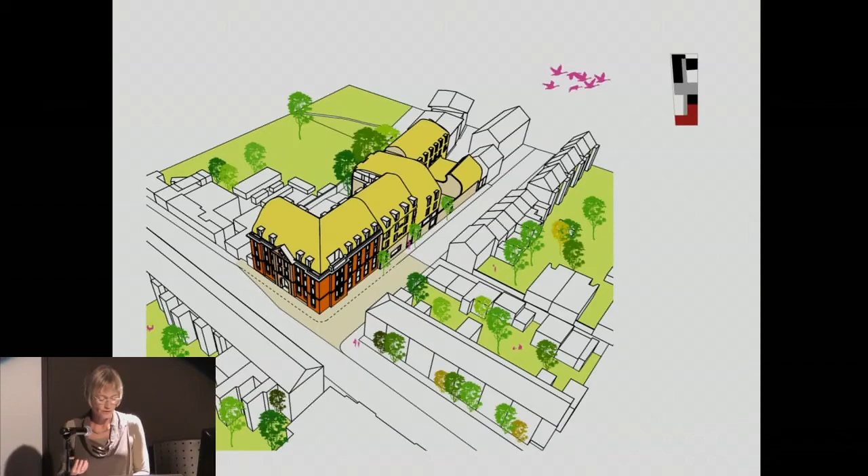So we optimized the site and then modified the volumes to respond to the scale and character of its neighbors. And then the wrapping of all of these volumes in this sinuous curving roof lends the scheme a coherence and an identity and a material quality that we developed, which is about announcing the fact that this is now Exeter College, it's not Ruskin College. The patterning of this roof refers to the arts and crafts tradition of both its neighbours and of William Morris, who is a graduate of Exeter College and a student of Ruskin.

So the connections are many and varied across times and cultures. This diagram illustrates very simply the concept of excavating the basement. So this is where the archive is going to go.

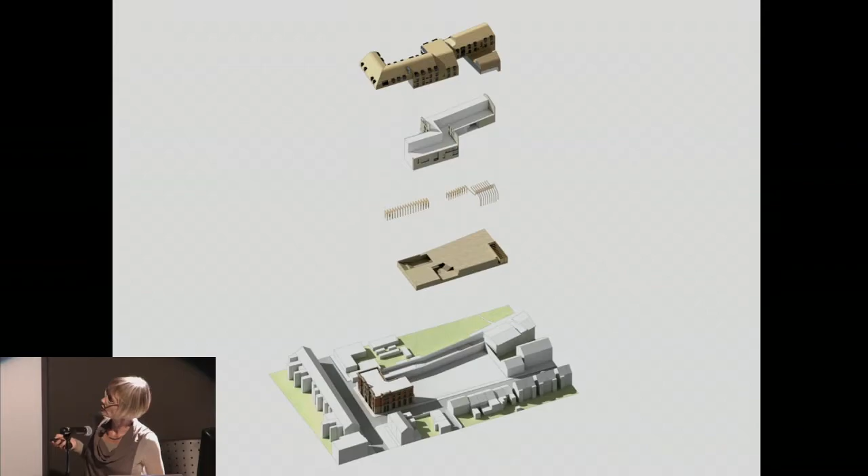The archive is contained within a stone plinth, which is carved for the Learning Commons, upon which is the cloister and the hall, the student accommodation, and then the all-encompassing roof. And so this, in a nutshell, is sort of 6 stories of accommodation: the basement, the ground floor, first floor, second floor. So it's 90 student rooms. The 3rd floor with the fellows' studies opening onto roof terrace, and then the 4th floor with more fellows' studies tucked up under the roof.

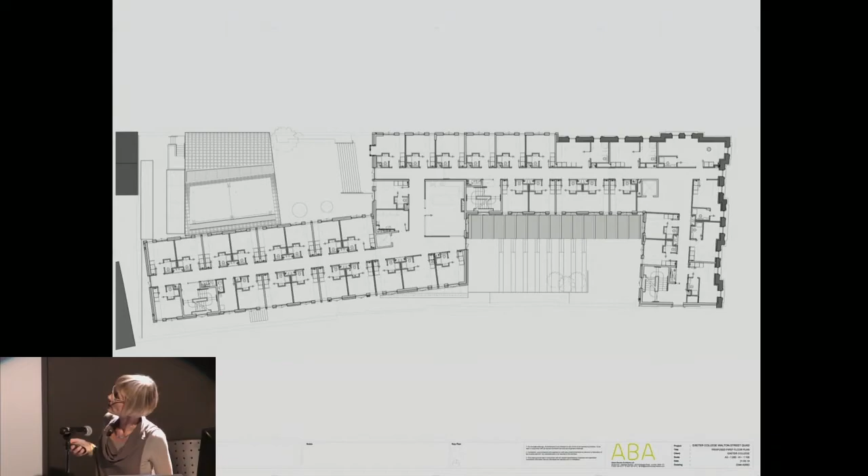And these are the final plans. These are a sort of stripped out version of the typical first floor plan. So you can see it's quite efficient. The student rooms all with ensuite bathrooms, family kitchen at the heart of the quad. And one of the main intentions, this is going to be the first building in Oxford that's fully disabled accessible.

Most of the listed structures are not accessible at all to less able students or staff. So this building has 2 lifts and 3 stairs - 1, 2, 3. So we couldn't quite adhere to the concept of 6 rooms to a stair, but I think we've managed to create distinct elements of the quad so that each arm is its own kind of community.

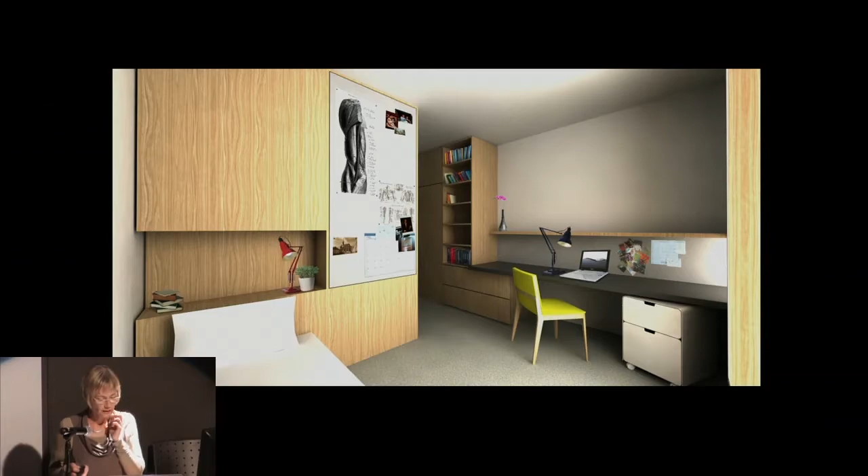And this is a typical student room with the principle of sort of diffuse light washing across the study space, and the window with its window seat, taking in the views from adjacent landscapes.

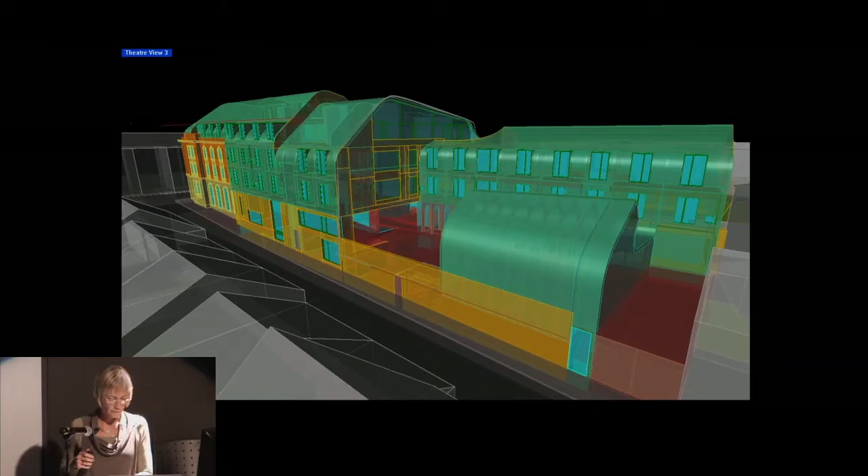So this is an early study, a modeling of the roof form, the wrapping, in effect, of the new accommodation within this curvilinear skin, and then the stone base, creating a sort of walled garden.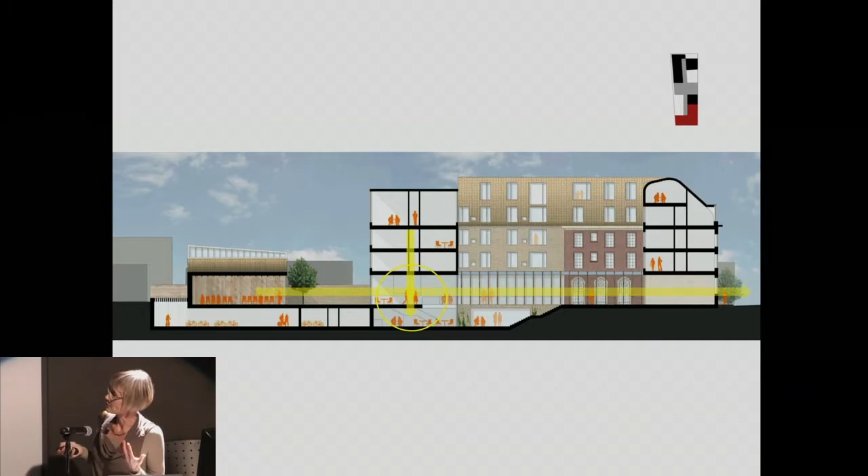And this is an important sort of public access to the lecture hall, which is going to be open to community functions. And in section, you can see the sort of height of the building, and at the center, the other great thing about the S shape is that it allows the sort of maximum point of circulation to happen in that place of the Learning Commons.

And so the idea was the principle of maximizing encounters, social encounters, through the configuration of the building.

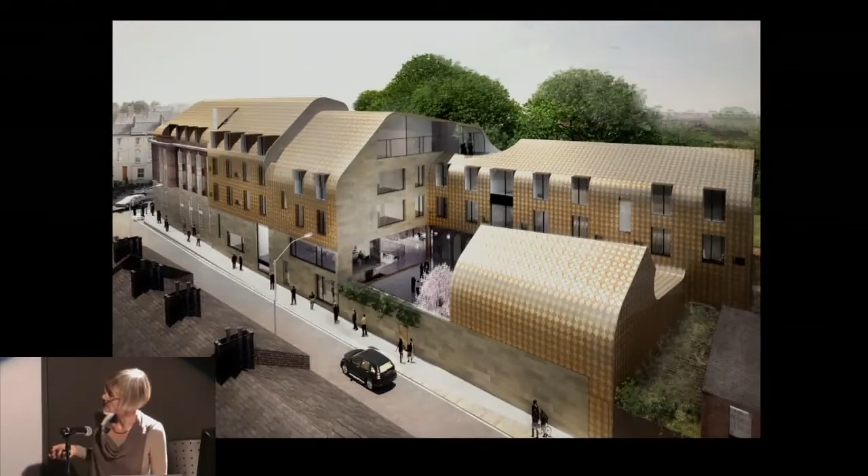So this was a sort of competition render, which proved to be quite controversial in planning terms, and the neighbours, Worcester College, weren't too thrilled about this coming into their view. But it sort of established the principle of preserving the Ruskin College facade and then stepping the volumes down to respond to the little 2-story artisan cottages of next door.

These are the consultations that we had to undertake over this 2-year period to convince everybody that we were doing the right thing. But I shouldn't be so flippant about it.

What's actually really good about places like Oxford is that you do have this dialogue, that there is this questioning and testing, that you have to lead not only your client - the client is generally convinced - it's the stakeholders and the preservation and conservation societies and the neighbors and English Heritage who actually demand a highly articulated defense, like a thesis, of the project, and want it explained generally every month between when you first approach them and until they feel that you've prepared enough information to make a planning application.

And so this is just the books, some of the books that we had to produce, not even the drawings, of justifying our scheme on all sorts of terms: landscape, ecology, heritage, conservation statement, access statement, everything under the sun.

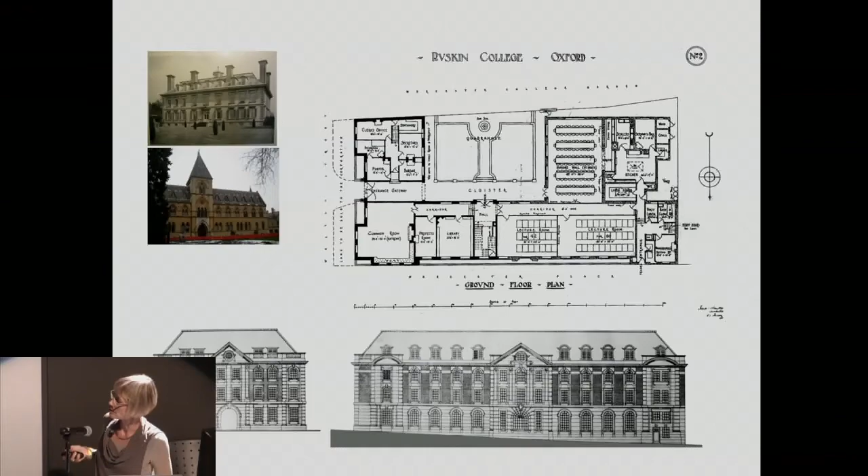But the key thing about this drawing was the height of the roof and the proportions, and the height of the dormers, because that was the most controversial thing about our scheme.

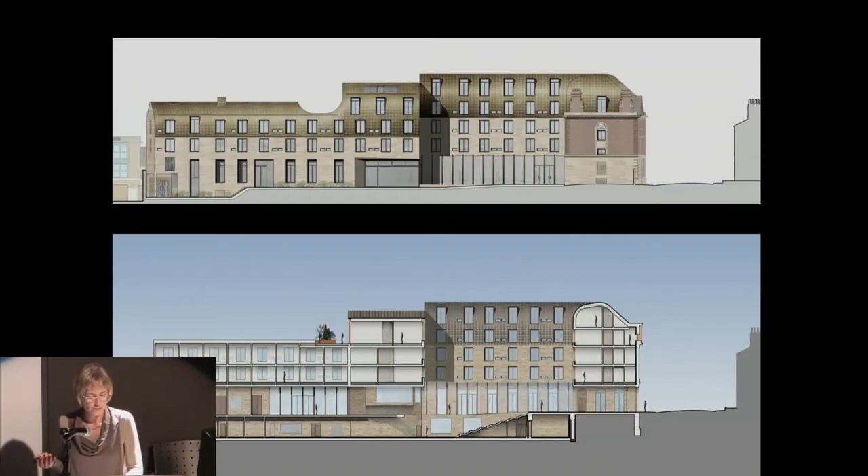I don't normally show elevations because I don't really believe in them, but I think it's important to show the extent and how this building works very hard to accommodate its many uses within quite a modest envelope.

And this was the view that caused the most contention, because this is the view from the Grade 1 listed gardens of Worcester College. At the moment there's a one-story building there, and we were proposing a two-story building, and this held up the building in planning for about half a year.

So these discussions about height and scale are relative to context.

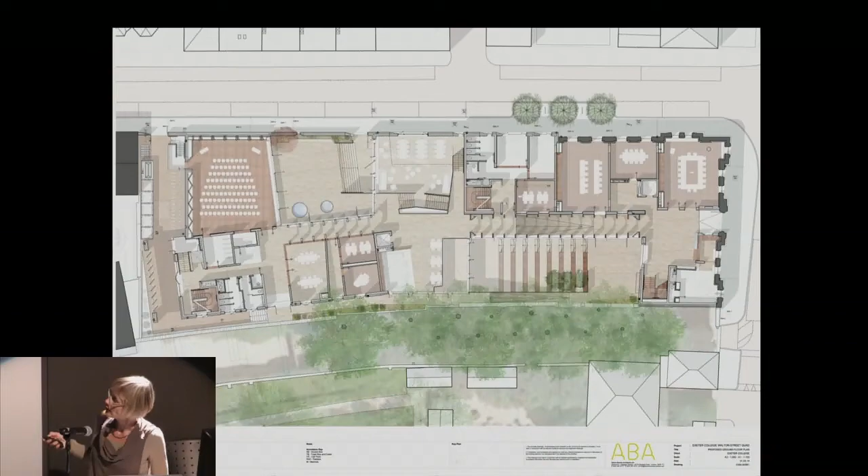And this route leads into a foyer space, and then what we've called the wall walk. So the principle of a continuous ambulatory has been maintained through all the vagaries of design development.

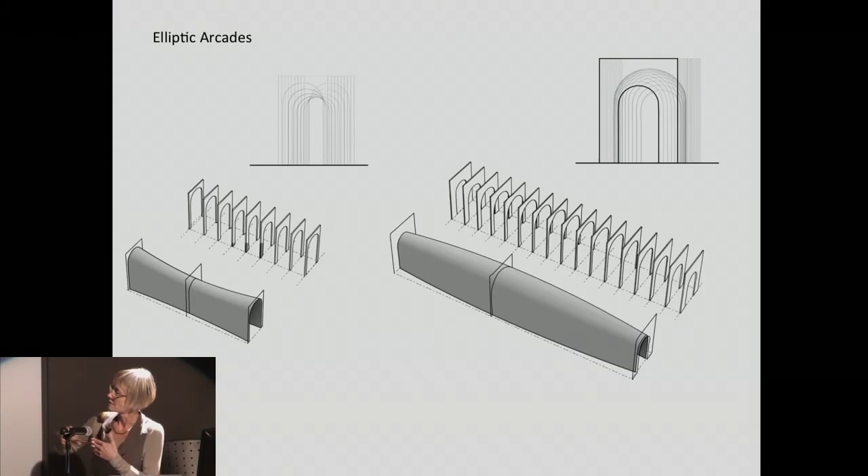Our inspiration in a way for that cloister was these windows, slightly later than Palladian windows, but just the principle of arched, semicircular arched windows which runs throughout the existing building. We've translated this into a contemporary idiom with these timber fins, each of which has a profile defined by an elliptical shape. The idea was that the cloister, rather than being a linear series of frames, would swell spatially and transform so that you could gather and hang around and have more generous space. So it would become a place rather than just a corridor.

And then the north quad is convex—or concave, sorry—so that it opens up at each end and compresses in the middle.

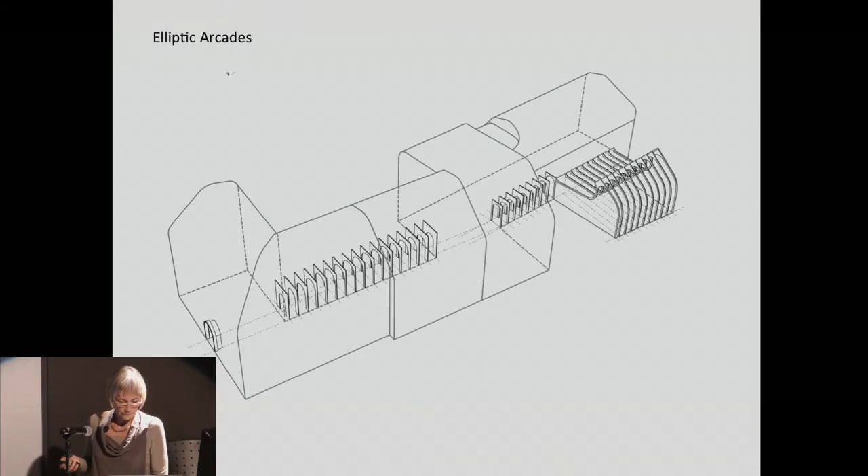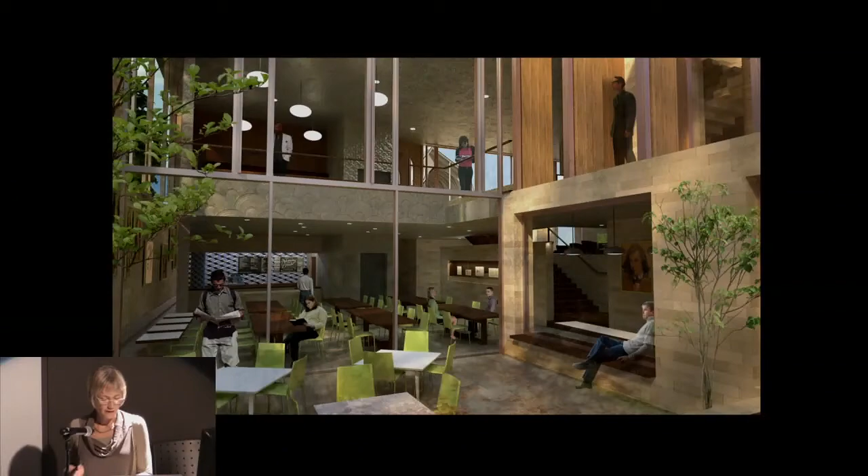This is the cafe as seen from the amphitheater. We've been exploring translating William Morris patterns into new tiles and concrete imprints, if they're not value engineered out of the budget, to draw on the tradition of Morris and his amazing creative output into the new quad.

This is the view of the learning commons, a multi-level space with quiet study areas and a mezzanine level leading up to the north quad in the hall. A view of this space from the north quad, where you can go down to the cafe, and there's a hanging study room up here on the left.

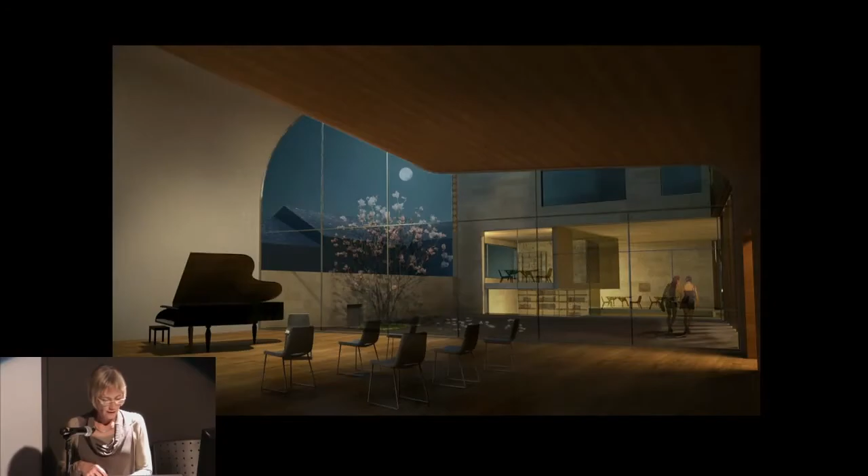And finally the hall, which acts as both a destination and a place from which you can look back towards the quad itself. The various layouts of the rooms and our structural explorations.

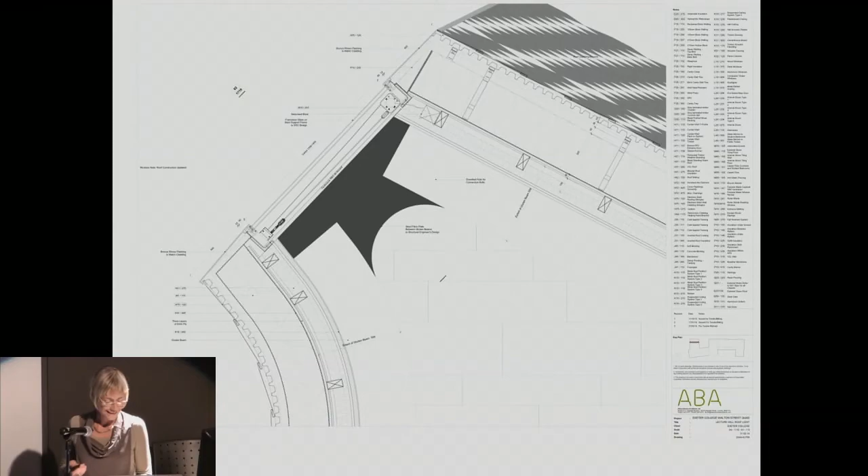It's going to be a glulam structure, the same material as the cloisters, and it's actually self-supporting. Each of these curlicue beams is quite an efficient structure in terms of the shear moment diagram, which is kind of amazing. I'm going to publish all of those drawings so it's understood how this piece of structural gymnastics actually works.

And then the top floor—I've run through these in earlier slides, but the most important message is that the curved roof is not just an aesthetic thing or a willful gesture or a device for reducing the apparent mass and bulk, but it delivers a spatial quality that will make it unique among Oxford's roofscapes, and has a softening effect both in terms of the building form and the spaces under the roof, and something quite extraordinary in terms of framing the views to the neighboring city.

And finally, the roof material. We drew our reference and inspiration from the flèche of the George Gilbert Scott Chapel, in Exeter College's Turl Street Quad. There, all of the spires have leaded flèches, and this patterning and iconography of the spire we felt was both an expression of craft—roof craft that is gradually disappearing, but there still is a craft-based industry of metal roofing in the UK—and we could draw on that and the beautiful tiling of the chapel.

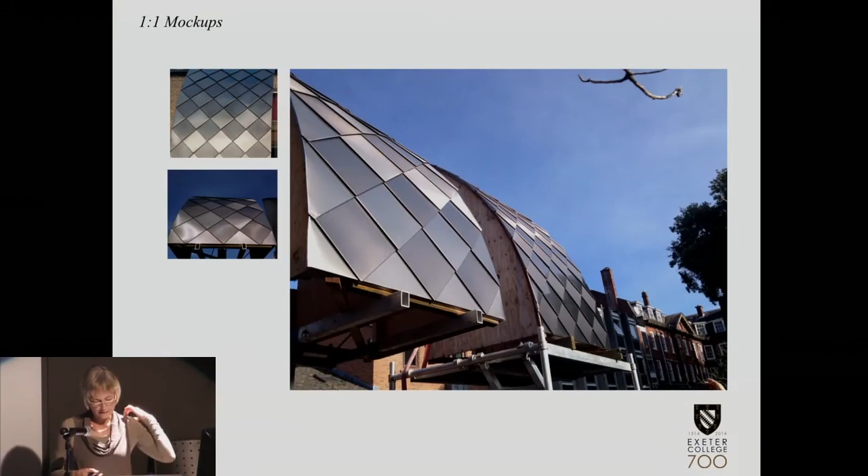And bring that into the quad in a new way. So the checkerboard tiling of the roof is actually a very contemporary material. It's Rimex, a patented process by a British firm that works in Enfield, in the east end of London, and it's oxidized stainless steel, and depending on the chemical mix, the molecular layer on the surface of the stainless steel can be modified to produce different colors and reflections.

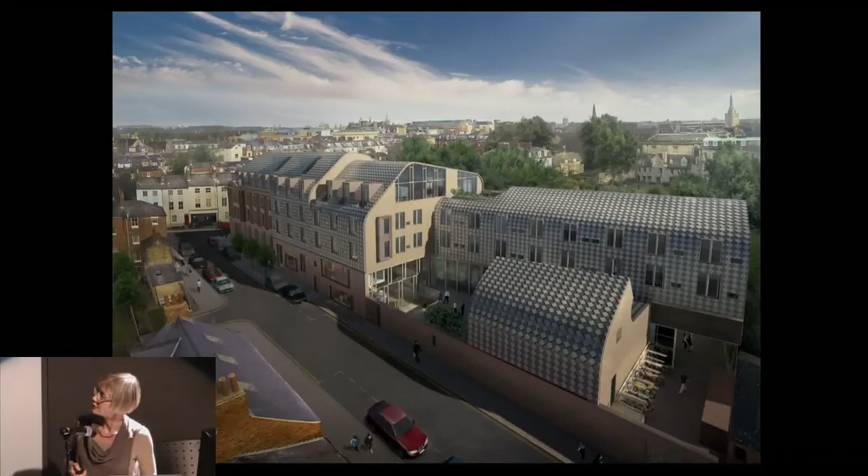So there's very subtle patterning. We've produced about six mock-ups to try to achieve the right effect of an iridescent and subtly patterned skin that represents Exeter College in its new site in Jericho, with its particular character, and gives the college itself a completely new identity. So this is the scheme.

It's actually on site. The demolition contractors have got up to about here on the site. It's going to be completed in May 2016.

And I'll just conclude with this quote, from Edward Relph, who is a Canadian geographer. He teaches at University of Toronto, and he wrote the book Place and Placelessness in 1976, which was the first book to describe or analyze in a scholarly manner the notion of place and placelessness as its opposition.

I used this quotation from his book in a recent competition submission for Northwest Cambridge, and it seemed to strike many chords. We won the competition, but I think it's an important point of reference for our work, not just in housing, but also in projects like Exeter College, where the idea of home, a place where one dwells and derives identity and from which you look out on the rest of the world, is such an important aspect of our well-being and our sense of community.